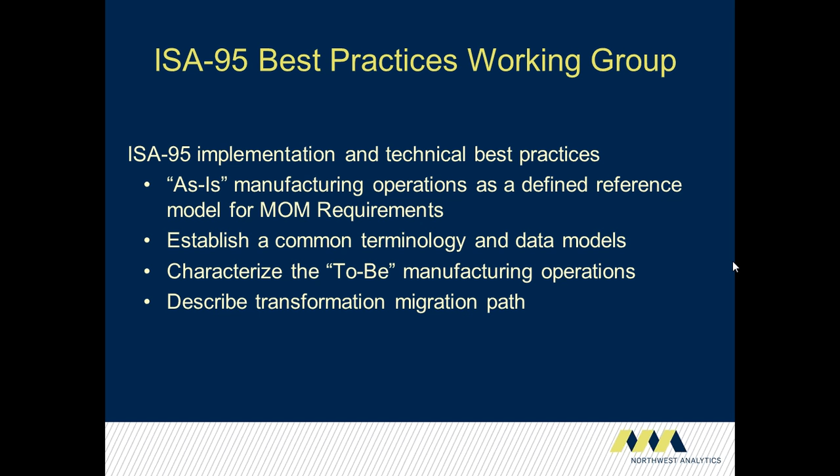The group was founded in 2004. I was the founder, but I had a lot of people helping me at the time. We sat down with the primary goal of writing methodology white papers, so that people would basically understand how to apply the standard in various ways.

To date, since 2004, across now 3 collections of white papers in our 3 books, we've produced 24 white papers through a true peer review process.

What I've done is, over the years, I go out and seek specific authors to write on specific topics, and then I get contemporaries, literally from around the world, and I typically get anywhere from 5 to 10 reviewers for every paper, and that's why every paper takes anywhere from a year on the low side to typically a year and a half to 2 years to complete, because by the time it goes through the review process and the editorial process...

It's been literally a global effort. We've had authors and reviewers from 18 countries in producing the works that we've done.

We put them into basically 3 books. Book 1.0 was Hitchhiker's Guide to Manufacturing Operations Management. Book 2.0 was When Worlds Collide, and that book in particular was given the ISA's Best Standards Book of the Year in 2011. And then our new book is the MOM Chronicles, Book 3.0, and so that's the overview we have of our group.

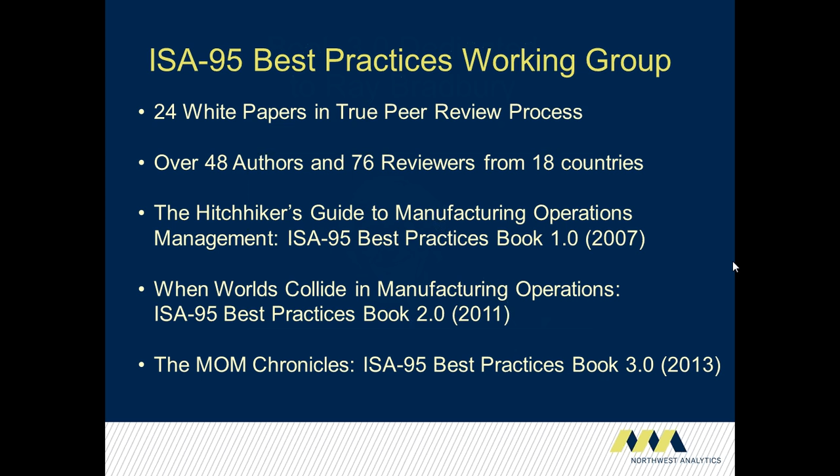And so, in that same regard, we've taken this book and dedicated it to Ray Bradbury, who is the author of the Martian Chronicles, who we basically spun the MOM Chronicles name off of. I want to just have a brief explanation of Ray Bradbury, since we did dedicate the book to him.

Ray Bradbury produced futuristic works in the 20th century that influenced many of my contemporaries and myself as technologists and scientists, basically to try to influence the world in a positive way to make it a better place.

Ray Bradbury passed away last June, and he was an author of many books, but his celebrated literary works were Fahrenheit 451, the Martian Chronicles, the Illustrated Man, Dandelion Wine, and Something Wicked This Way Comes. He received many awards, including the Pulitzer Prize special citation in 2007. But the Martian Chronicles is an extremely interesting book because it's a collection of short stories

like our books as in the working group are a collection of white papers. And the Martian Chronicles was written in 1950, but it was written as if in today's time.

So humans colonized Mars in 1999 in the Martian Chronicles, and in trying to colonize Mars, they found themselves conquered by that planet. There's a parallel here: the way that humans in the Martian Chronicles attempted to colonize Mars as they would Earth, they found that to survive and exist and thrive on Mars, they basically had to harmonize with the planet.

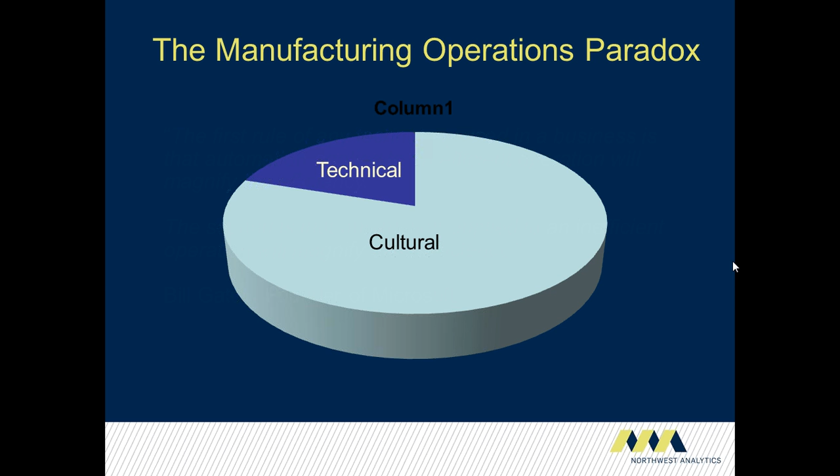And Bill Gates alluded to this in one of his quotes that I like, where he said the first rule of any technology used in a business is that automation applied to an efficient operation will magnify the efficiency. The second rule is that automation applied to an inefficient operation will magnify the inefficiency.

And this is really the lesson that we've learned in trying to apply manufacturing operations over the last 15 or 20 years. Well, with that thought from Gates, have you identified any reason why manufacturers don't do the necessary process evaluation and re-engineering before they implement MOM systems? It's always seemed to me like they're missing a really rare opportunity to step back, analyze what they have, and get it right.

Well, the answer is that it's hard, for one, but manufacturing from the 20th century became very departmentalized, and the organizations still are. So over the last 20 years, as manufacturers have been attempting or applying some successful manufacturing IT type solutions, they did so at a departmental level, and they did so for good reasons, to reduce paper and to address the need for analysis within the department, be it scheduling or maintenance or warehouse or production.

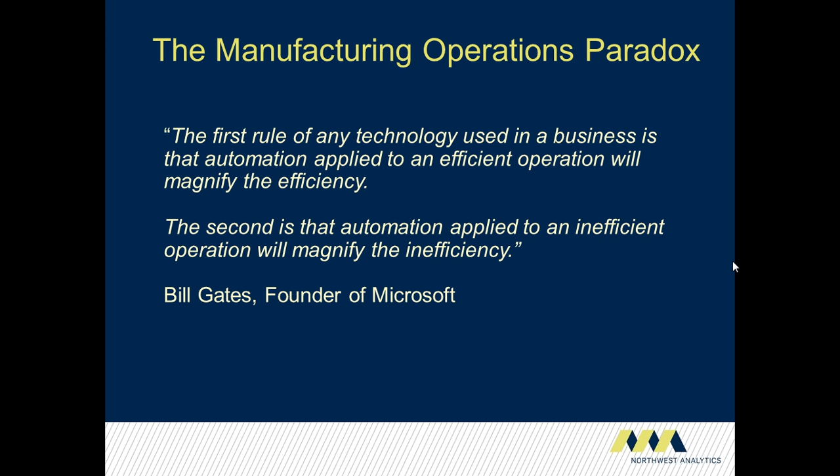And so with that, let's talk about the book a little bit. The book has 7 white papers, and there was a tremendous amount of work put in by the authors and reviewers to get this work out. I worked with them for 2 years on this work, and there's some what I consider to be cutting-edge thought leadership in some of these papers.

The first paper is around applying global MOM systems using what we call Manufacturing 2.0. The second paper is around the role of semantic models in order to have smarter industrial operations. This paper addresses how to go about applying some of the semantic modeling within cloud technologies as well as within SOA technologies, and they address the change management question in there.

The third paper, applying manufacturing operations models to discrete hybrid manufacturing environments, shows how to use ISA 95 Part 3's activity models to do the as-is and the to-be requirements and build a roadmap. It shows the method for doing that.

The fourth paper, which is a paper we've been waiting for a long time, is defining an operations system architecture and showing you that there are many different parts that are part of building a cohesive and comprehensive operations system architecture. It's a review of what standards are out there, what methods, and what the parts are.

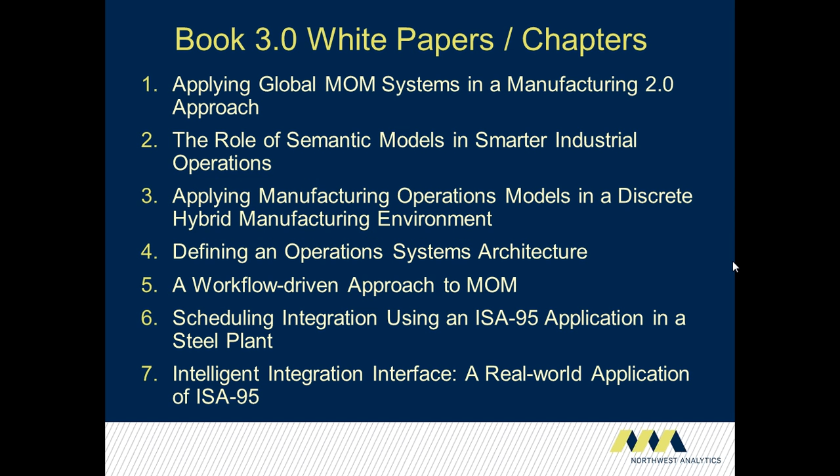The sixth paper is an actual real-world application of applying ISA 95 for scheduling in a steel plant. It gives you the context and the benefit of doing so. And the seventh paper is also a real-world interface application of using ISA 95, and it takes you through some of the questions you have to ask.

So the focus of the book - we step out there and literally say that current manufacturing leaders, and this is me pulling from experts from literally around the world, we feel that manufacturing leaders have a very limited vision, and this is very general, of how their plants must competitively operate in global markets in 2025. They're just starting to ask that question: how does my plant need to function in 5 years and in 10 years? But today they have a very limited view.

The manufacturers do not have a concept of what the engineering costs are required to transform from a paper-based departmental world with independent languages in each department to a real-time artificial intelligence for the work processes, and basically get that big gain of 20 or 30% more efficient than they are now.

The proven reality of manufacturing operations is that it is manufacturing innovation. It requires iterative, continuous improvement processes around the systems, dictating the requirements for the systems. If you do the systems without considering whether the processes are engineered well, and where we have to engineer them to, the systems become actually a barrier to improving the processes. So by 2025, those manufacturers without paperless work processes for intelligent operations simply will not be very competitive at all.

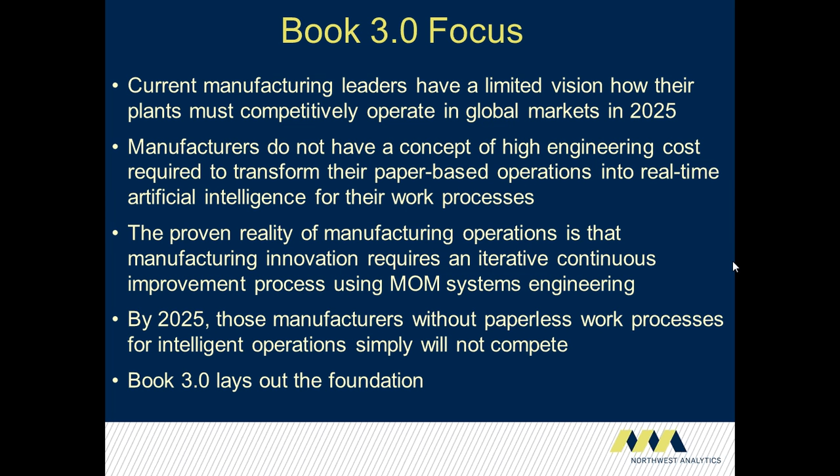And the book lays down some of the foundations to basically start this journey. The book also explains what MOM system engineering methods are and how they organize the complexities of this 21st century manufacturing plant, and how it has a real-time interactive role in a global supply chain.

The book stresses not to trivialize operations, as many ERP applications will do, as simply a problem of equipment operations, material quality, or material consumption. That it is a problem of optimizing work process for the current demand state of that plant.

The book also explains the operation process definition, which acts as a MOM master user requirement specification. So you actually do the engineering, the as-is and the to-be engineering of the work processes across the plant, breaking down those departmental walls. That as-is to to-be re-engineered efficient operations is then supported by an operation system architecture. The to-be operations process definition determines the operations dependencies within the plant and the plant within its global supply network that it has to be a role player in.

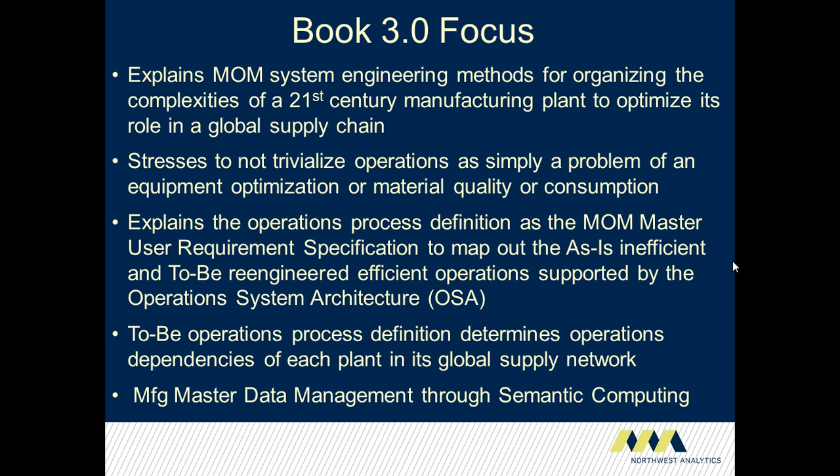So this is an example out of the operation systems architecture paper. It explains the steps of how to go about aligning your architecture with the business and the business drivers, taking you through that step-by-step process of reviewing the business roadmap, the discovery process, then classification against the standards of best practices, looking at the capability that the plant needs, ranking steps against business imperatives, and then refining and drilling down to the high-value areas that you're going to address in your roadmap and within your architecture.

Another example is from the workflow paper, chapter 5, showing you that if you look at manufacturing intelligence, not just as dumb portals, but as interactive portals that actually are built to serve purposes within different operational levels, and that you've mapped the interaction and the dependency of workflows within SCADA level 2, within operation management, within the supply chain, but also across areas and departments in the plant, understanding when something happens, how does that particular state cascade across the plant, understanding that cause and effect.

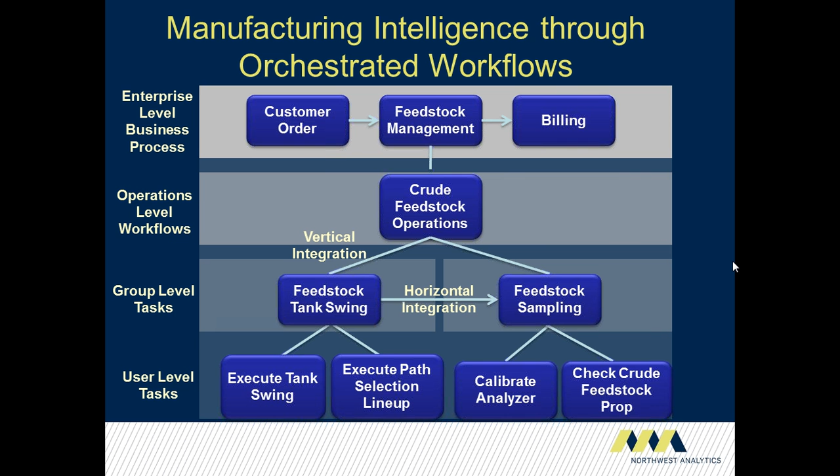And it explains how to go about building manufacturing intelligence based off of orchestrated workflows. It's a very interesting paper.

The semantic computing paper takes you through a bit of a journey itself, looking at understanding where we've come with the exchange of data from system to system, and how we've really come to a point where, instead of architecting systems departmentally, we're architecting systems to basically enable and support business and operations processes. And doing that within where we're at now, which is the information-oriented architecture, building off of the service-oriented architectures of the early 2000s, and now this emerging idea or concept of semantic computing, and how we're going to do that within distributed systems or cloud-based systems.

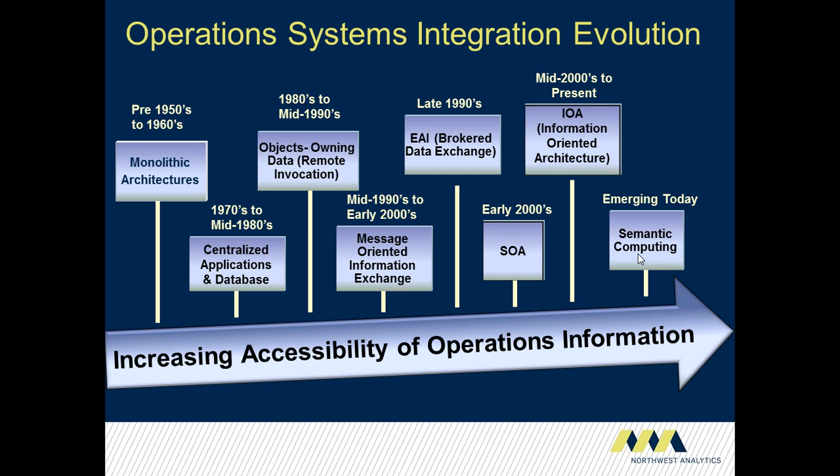The first chapter in the book addresses this concept of global implementations that are basically all built off of localized implementations, and understanding that master data management using semantic computing allows you to basically create a structure where a local plant, in this example sitting down in Sao Paulo, South America, has its products, its assets, its processes, its specifications, its regulations that it has to abide by, and that's its manufacturing master data.

And then looking at that plant within the corporate plant base of how it feeds its information into the enterprise information of quality, genealogy, compliance, performance, and product design.

So it's understanding that you have to have localized master data that maps to enterprise master data, and using semantic computing and master data management methods, you're able to do that effectively.

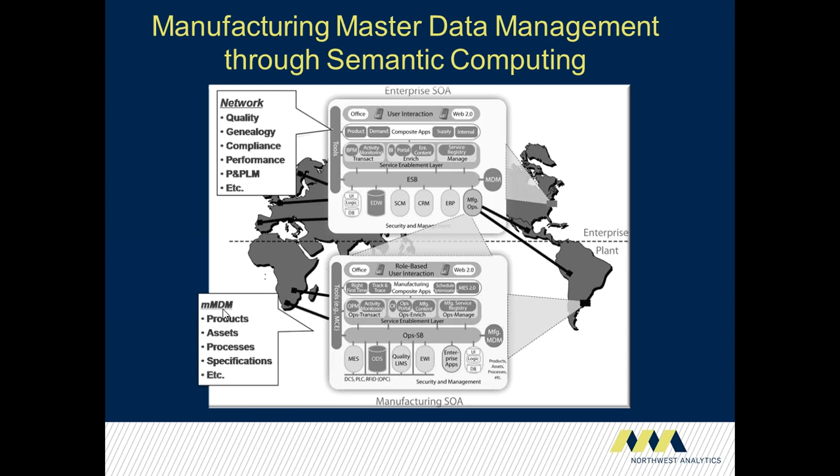So that's basically our short overview here. I keep it short so we can have some questions. I'm looking forward to some questions from the audience.

Okay, very good, Charlie. And as they come in, we'll certainly ask them. One of the things I noticed in one of your book focus slides was your mention of the operational aspect coming in, that it had often been trivialized in the past. And that's certainly, when you look at the whole ERP and transaction-oriented management model, they really don't seem to have any way to be aware of process and time series and operations, and that's a real problem. How do you do a CP Snow two cultures thing here and make this stuff come together so you can get a really functional system for enterprise management?

Well, so optimizing work processes within the operation management layer is a real-time optimization, and you have to. That's where the engineering comes in. You have to understand, when I have a piece of equipment go down, what are my alternative routings, and I need to communicate that back to scheduling, because I have orders to fill and I have WIP in progress. What's the most profitable way to basically reroute the work in process to fulfill the orders that make me the most profit around that downed